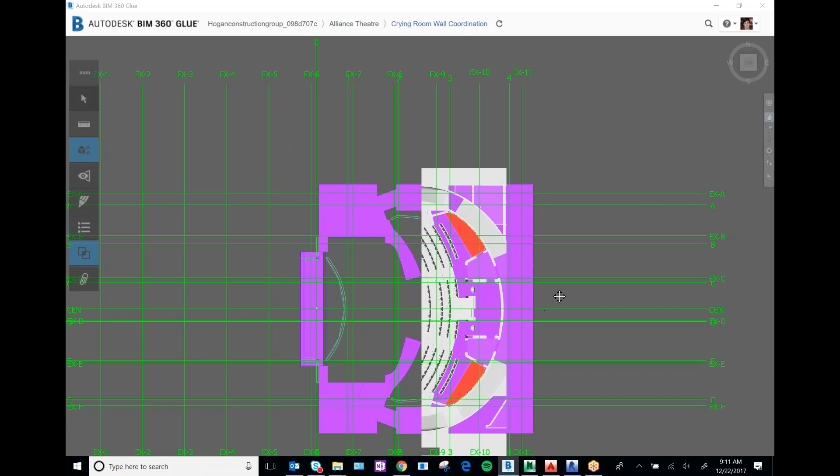Okay, yeah, I appreciate it. Thank you. Joe, were you able to get your stuff over to him?

No, I haven't got it in yet. When do you think you'll have it ready? I'll call and pester him again this morning since he was supposed to have gotten it as quick as he could, and I was hoping it'd be yesterday.

Okay, we keep needing to work on them every day. So I got the balcony, okay.

In addition to that, I got a points file from Hunter yesterday at 4 o'clock. And then I went and ran points on the crying room wall.

So that kind of leads me into the first thing we're going to talk about today. The best way I could look at this was in AutoCAD. So if we look right here, red is going to be the architectural model from Revit, it's the wall.

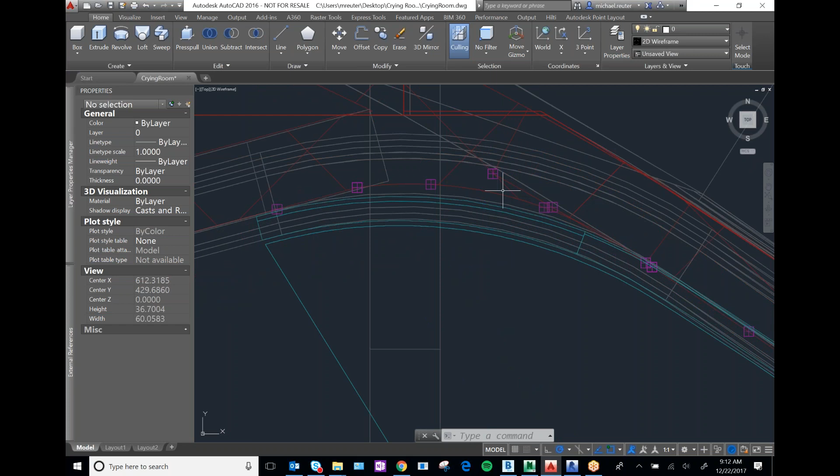Teal is Keller's model that I took, the DWG model from Glue, and then the pink little squares right here are the layout points. They're on, I think, 1 foot on center, but we had talked about 6, though 1 foot on center is good enough here. It illustrates the point perfectly.

So as I said in my email last night, as I was looking at this, I've looked at it in CAD, in Navisworks, in Glue, in Revit, and every time the same thing happens.

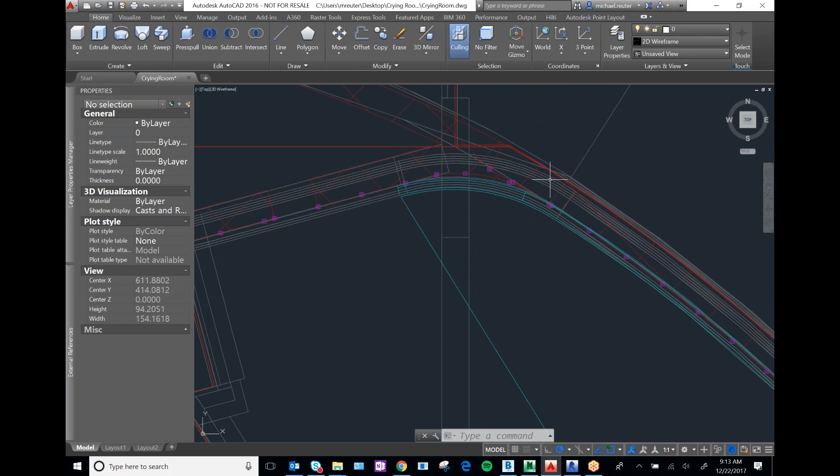You've got Keller lining up to a T right here at the north end of this wall before it curves, almost perfect. And then once we reach the center of this curve, we're off by about 3/4 of an inch right here, and then even over here we're off by probably like 1/4 of an inch.

So that leads me to believe that either it's an annotation error on the drawings giving a bad radius, or it was entered wrong. And talking to you guys, I really doubt it was entered wrong, because that would surprise me. So it's got to be one of those two things.

Because you can see right here the points line up, and as soon as we hit the center of this wall, we're off by almost an inch, 3/4 of an inch. So I sent you that file, and I wanted to see if you guys could confirm that it's not a modeling or some kind of viewing error.

I want to see what my... you can open either of the two, I would suggest opening the 3D APL file, but either one of those would work.

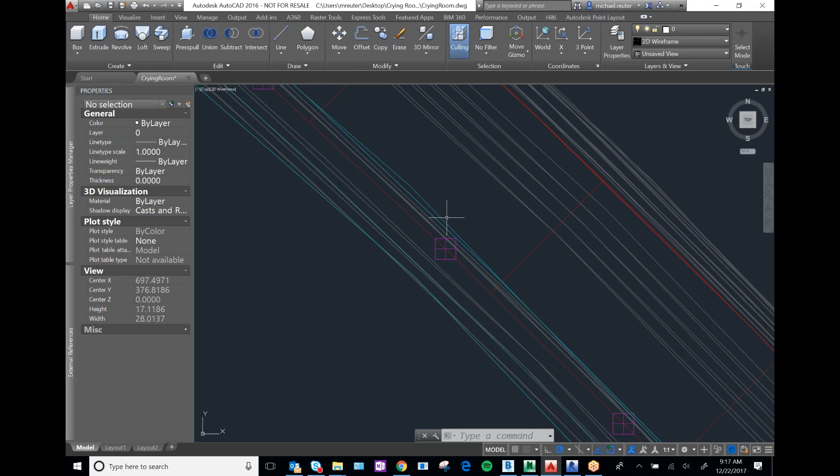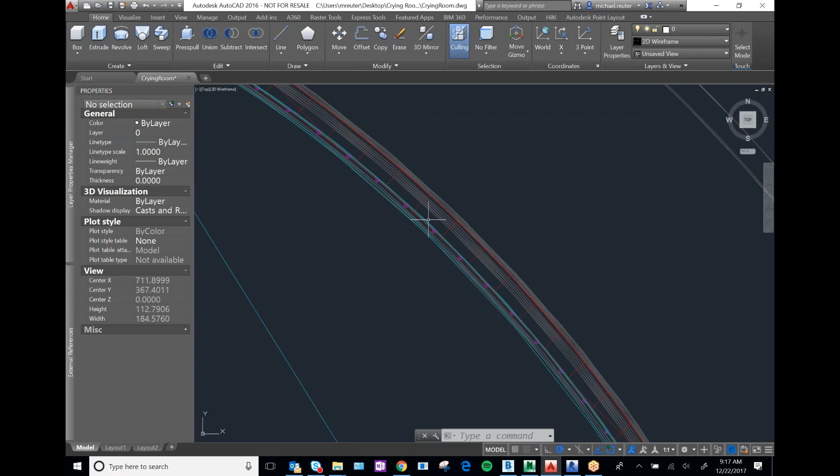We're closed all next week, but after the new year we will jump on this and follow through what you laid out for us. I hope it's just really a viewing error, but I don't think that's the case, because as we talked about last week, you increased your resolution 40-fold, and we're still getting seriously faceted curves, which we know we shouldn't be seeing at this point.

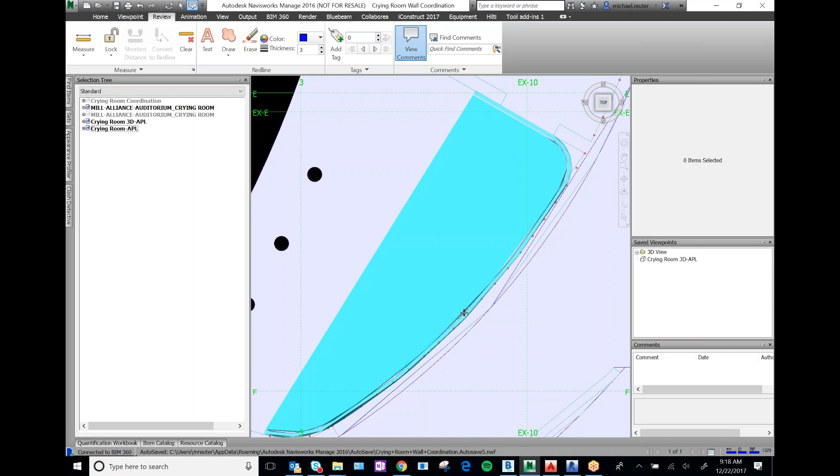So you can see when I'm in Navisworks, right here at the center of this wall, the teal points are right there. You can still see it, right when you approach the center of the wall. There's something, I really feel like there's a rounding error with the radius. That's the most reasonable explanation I can come up with.

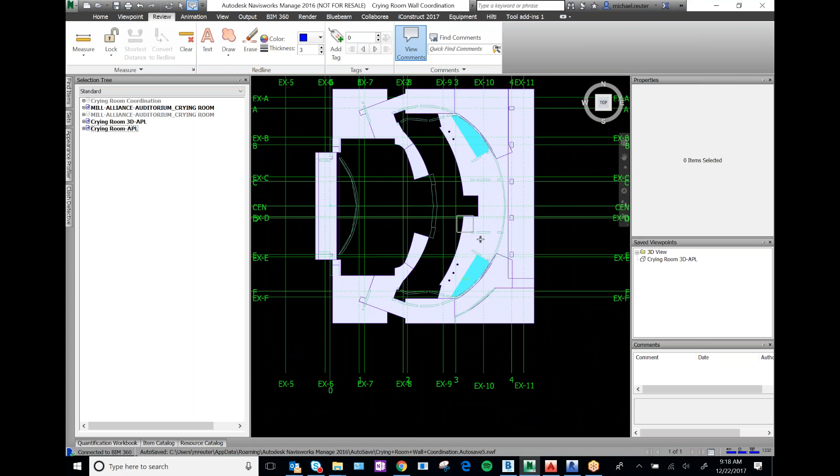So if you can indulge me, Michael, the first and second reflectors we got to you, those models are LOD 400, right? We've drawn and detailed everything that could possibly be in that assembly. How does the resolution look on those, the reflectors? Maybe there's something we're doing with those that we're not doing with just the simple surfaces, because right now the walls and other ceiling parts are really simple surfaces, since that's all the information we have right now.

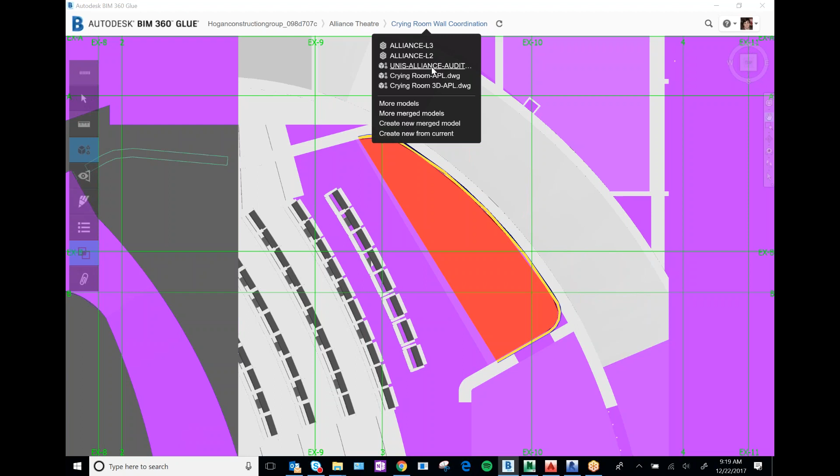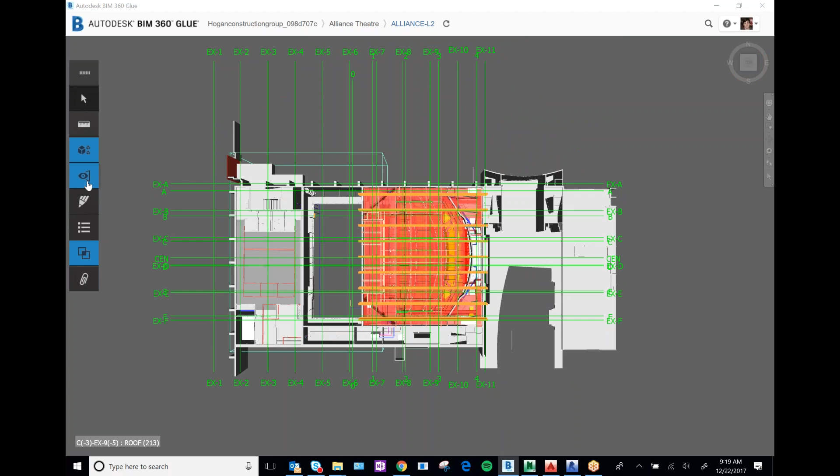So you're talking about the cloud ceiling, directly below the Unistrut models you got, I assume. Let me look at that, I've been looking at those a lot this week. Let me bring up my viewpoint here. Those are incredibly detailed. We'll jump right to this one right here.

So for some locations you've got the actual sprinkler head location in there. That looks awesome, so they fit in there. There were locations where they were off slightly. I noted them so they know to move it north. And I say, make sure, confirm that you're using flex pipe, but I know we discussed that last week.

Go ahead, and real quick too, this is partly for Hogan. Their sprinklers are coming down plumb, if you will, perfectly vertical.

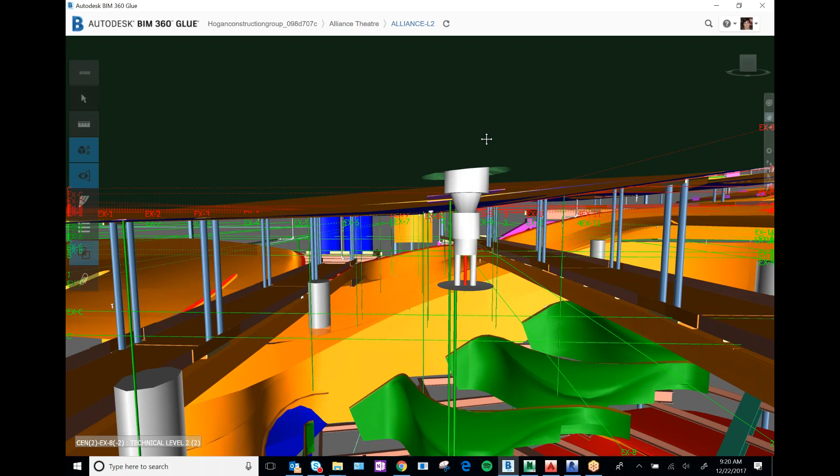Our holes that are cut in are normal to our surface, meaning they're not plumb with gravity like the sprinklers shown. It's not really a problem for us to do it one way or the other, but those are questions we need answered, because if the sprinklers are recessed or hidden and supposed to sit flush to the face, they can't come out plumb. They have to be set to our surface, which isn't flat or level, it's a curved surface.

Has Sentry joined the call? I assume not. Okay, he has not. I'll get that note over to them.

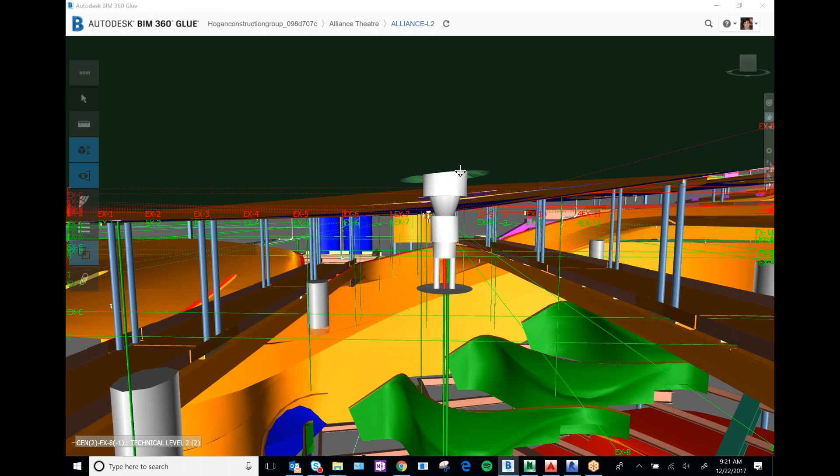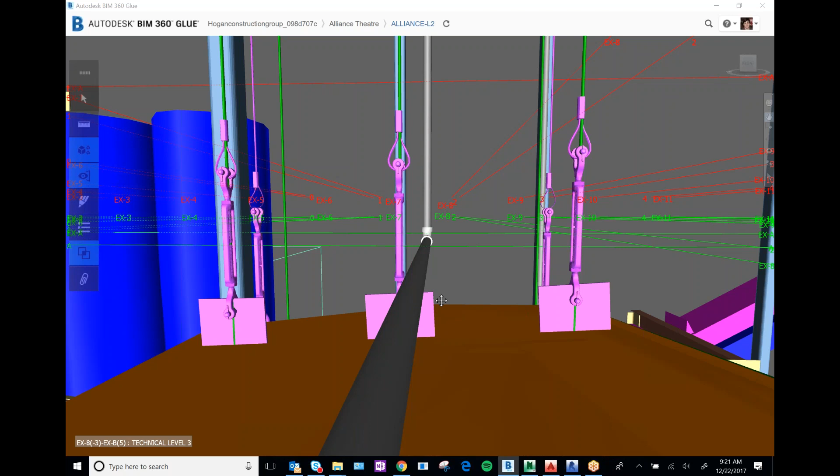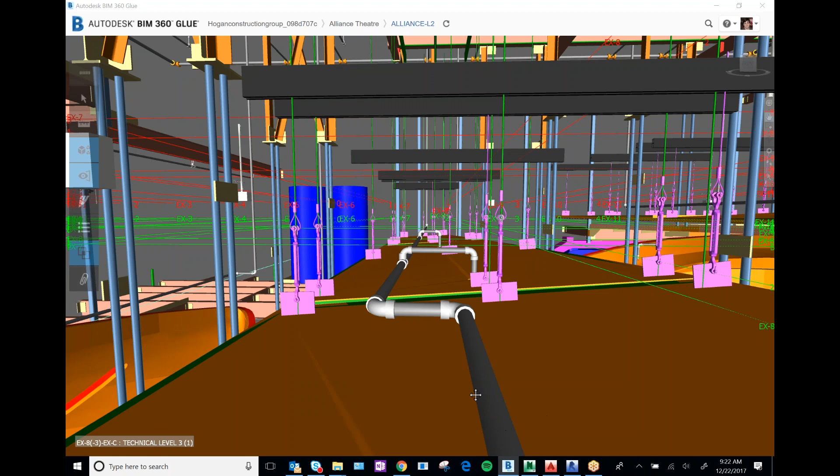I think that with using flex heads, that shouldn't matter, but we'll confirm. We have some pretty serious details in our submittal, Hunter, so if you just clip it out and send it to them, it's well detailed what I'm talking about. The way the flex head works, the hard pipe branch line stops within 2 feet plus or minus of the hole. I've never actually seen a flex head, but that leads me to believe there's enough play in there.

What's going to happen is right here - this is going to be the flex head from there down, so they'll be able to do whatever they want. On a flex head, it's basically like a wire mesh over corrugated pipe, so it's reinforced but pretty movable. A lot of those companies have started going to those so they can move them where they need to and don't have to be as precise in the beginning.

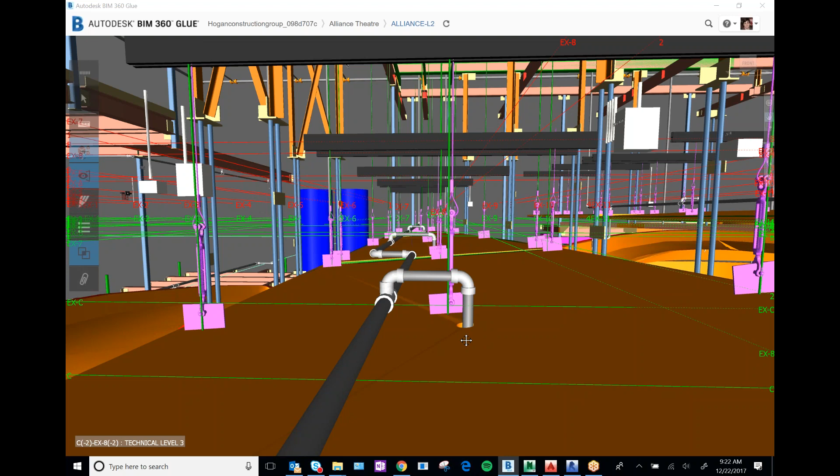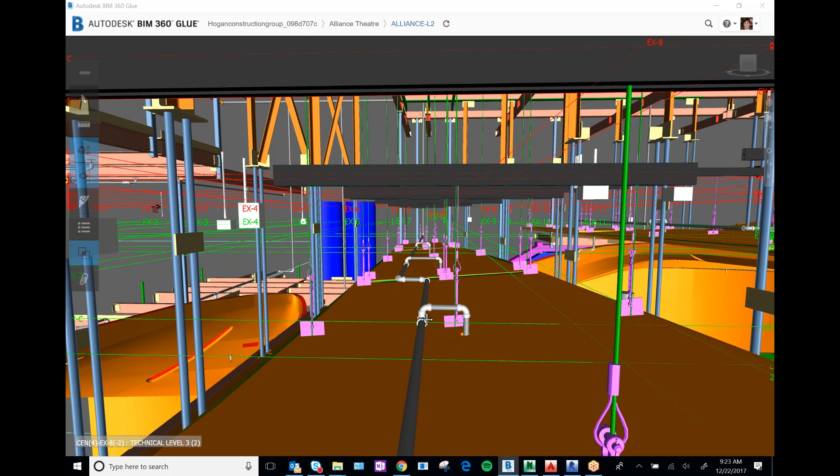So I feel pretty good about this. There were a couple of instances where on one of these cloud ceilings the sprinkler head was hitting your hangers, so I noted those for him to move. They were on either end of one of these cloud ceilings. I don't remember exactly where, but I noted it and sent it to him.

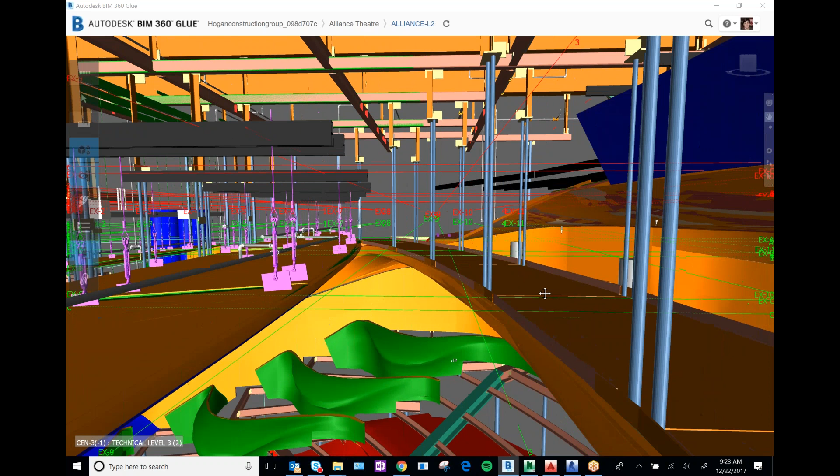This was fantastic - that's why I was asking about the locations of the holes, because we've got this one right here, you can see the holes are coordinated. But then the catwalk and both edges of your millwork, they didn't have them coordinated. So I was curious, since you guys had these set up before, did Century send you something so you had the locations?

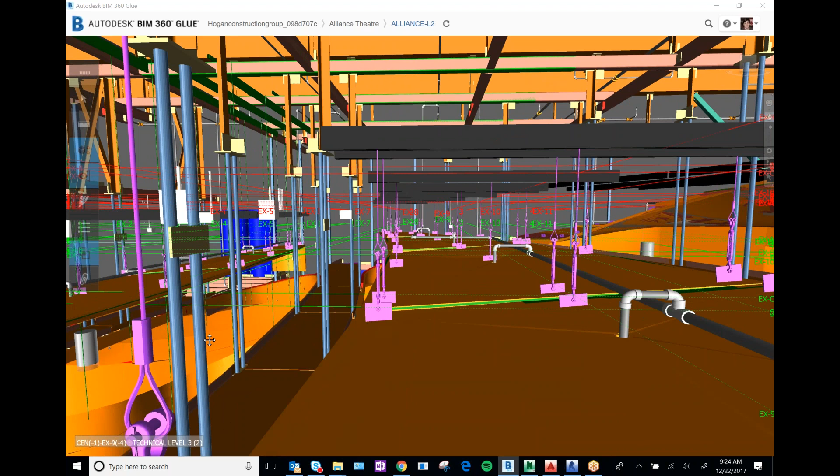I think we took it off of an ASI drawing. I don't recall exactly where we got it, but it was a formal drawing either fed to us by Hogan or by the architect - I think it was their original submittal, their original design that they submitted to the city.

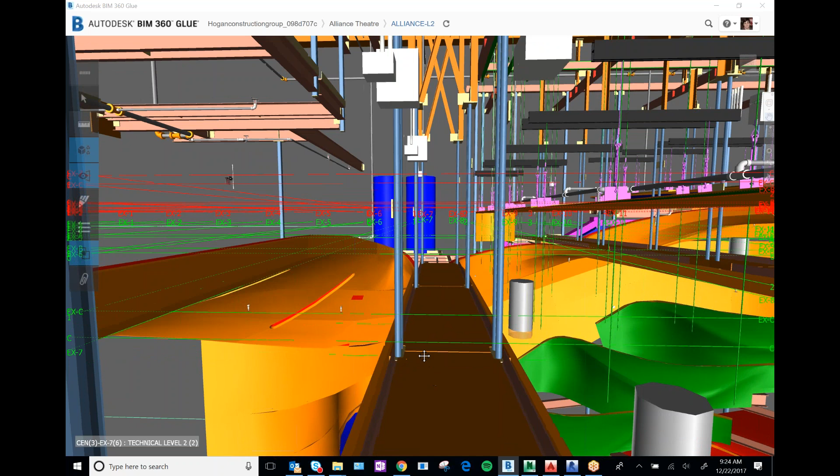So that was why - these were all perfectly lining up, and when I ran the cloud ceiling against it, there were hardly any clashes. But when I ran it against the rest of your millwork, it was like 5 to 10 times as many clashes. Part of it was because the sprinkler head below hasn't given you holes yet, I think it's just that simple.

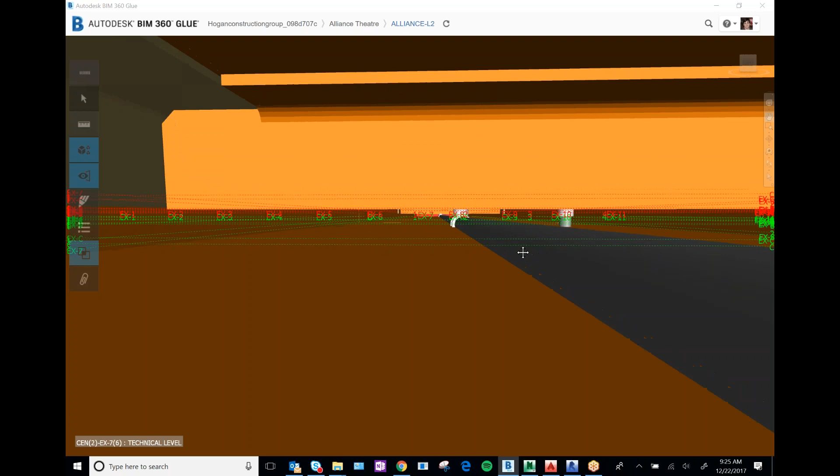We haven't - the first and second reflectors are the only ones we've been able to put into fabrication engineering so far, and that's not entirely finished. So we're working to get the rest done.

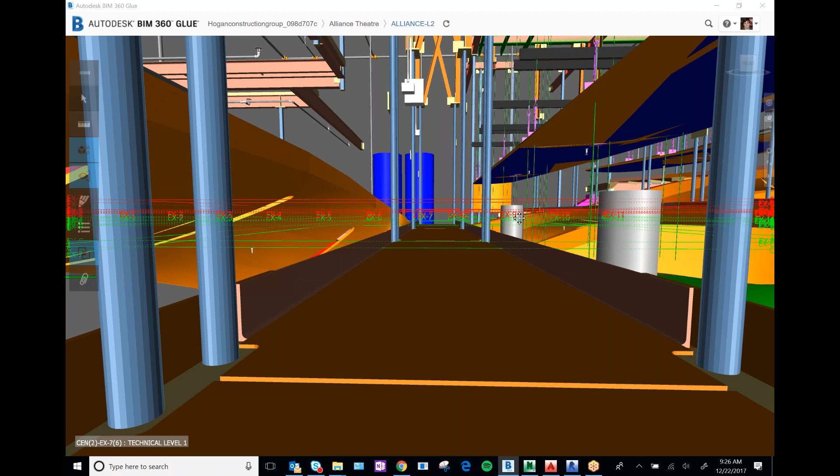I have a quick question. All those hangers we were looking at above those ceilings, how important are they, where they need to be? Have we looked at those versus the ductwork? Because there's some pretty large ductwork above those hangers, the Unistrut. I looked at those this morning and found there's an instance where it's in a different model, but yes, your large ductwork basically right here is getting whacked.

He's going through both the electrical - there's a whole lot of conduit underneath your duct. He's hitting that, and he's hitting this large duct that's coming up right here. I'll show you guys that shortly once we finish going over the sprinkler head, okay, we'll jump into that.

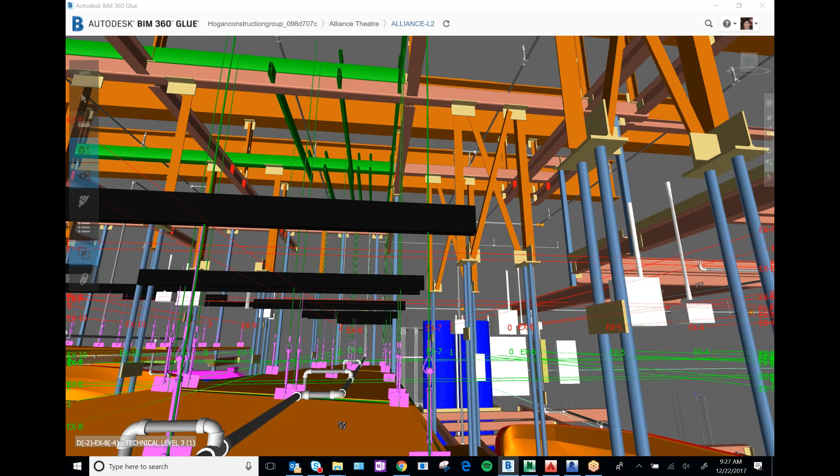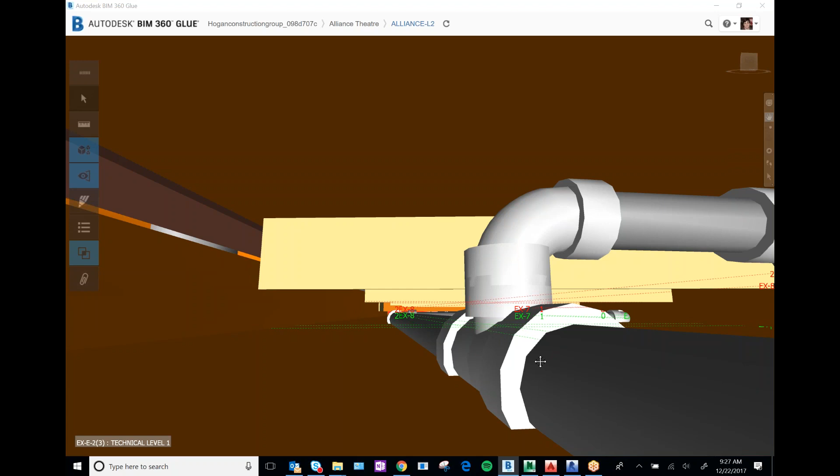Okay, so last thing about the sprinklers and the millwork. The thing I'm really most concerned about with the sprinkler heads is basically they're under here, in between your millwork panel and the bottom of the catwalk. There's support steel and sprinklers here. This kind of threw me for a loop - I was really surprised by this when I ran the clash.

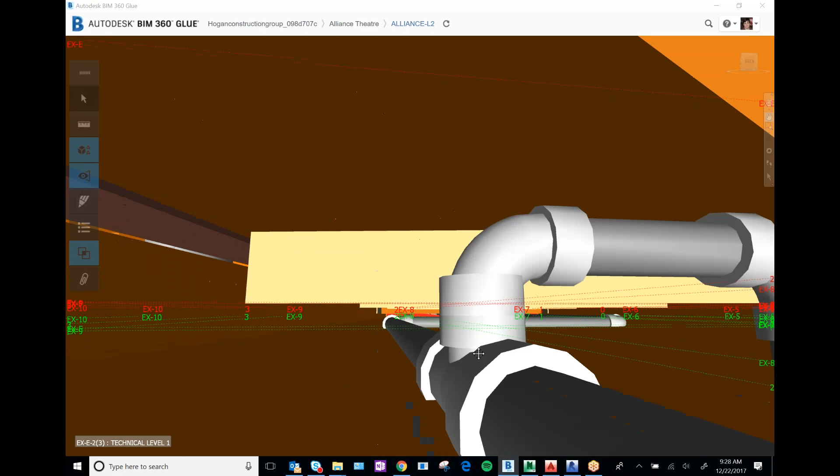The heads aren't really the issue, but I don't see how this pipe's going to run because you guys are curving in the X and the Y, but you're also curving in the Z here. So there's no way - I'm pretty concerned about this from an installation standpoint. The sprinkler head would have to be installed perfectly, and then our panels would have to slip around those exactly. And once our panels are in place, you're never able to get back in there and make any adjustments to the head of the sprinkler or to the pipe.

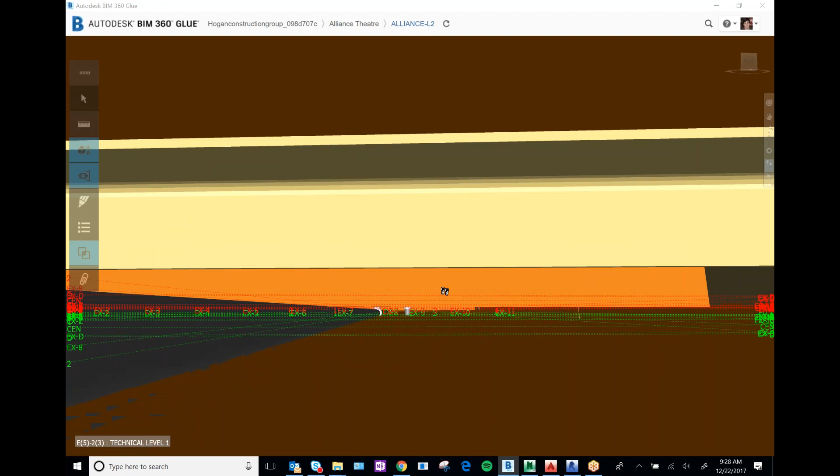Because the floor of the catwalk is not removable, right? It's welded down. It's already in. So I have absolutely no idea how - no answer. Like, when I saw this, it scared the hell out of me.

I was just like, man, this is the last thing that we need right now. This is something I wish I would have had in September or August or something. This is a holy crap kind of thing. So when I saw this, I'm just kind of blown away right now - this is freaking me out.

Is it the clash that's got you concerned, Michael? The clash with the millwork? Because we can pocket out the back of that millwork. I'm not too worried about the pipe that's running along the direction - I actually think pocketing it out isn't going to be a major issue.

Just from a job perspective, and Hogan's thinking too - wow, how do you get that in there and make sure it's coordinated so my millwork just slips right over it? Yeah, it's the constructability concern. It was both really, because the whole deal was, when we signed off last week, they're adhering to us - and this is one of those instances where that's just not possible.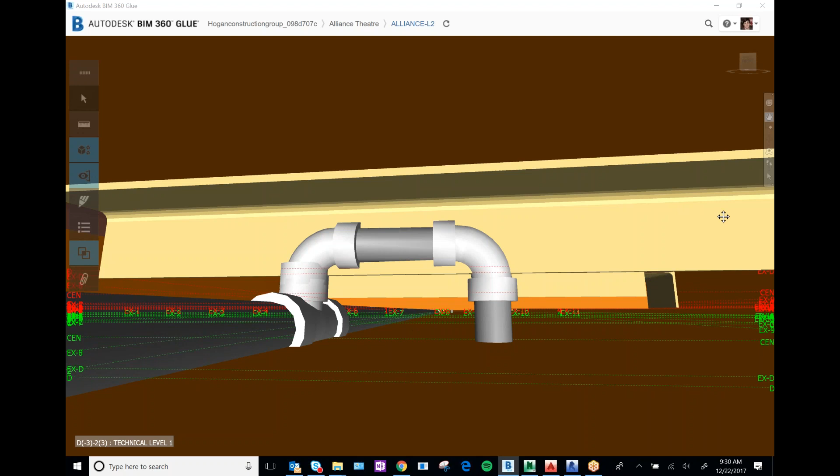The constructability of it really concerns me, because like I said, it's the Z coordinate that you're curving with right here. That's the problem. Every time that there's a grommet or a connection, it's deeper - I think it was like 3/8 of an inch into the bottom of your millwork.

Into the back of the millwork. Yeah, so I would say the only path forward - because even if that sprinkler was pushed tight up to the underside of the steel angles there in yellow, there'd probably still be a little bit of pocketing. I think the pocket is probably the only way forward to get around the sprinkler.

It's not ideal for us, just because when we're making that billet, it means that we have to machine it twice - we have to machine the face and machine the back.

So let's just keep - I would ask that you push Century, I think is the sub, to see if they can push it literally tight up to those angles and see if that helps even a little bit. Right now he's tied up against the bigger angles. I'm assuming that's why he's not hitting these smaller ones.

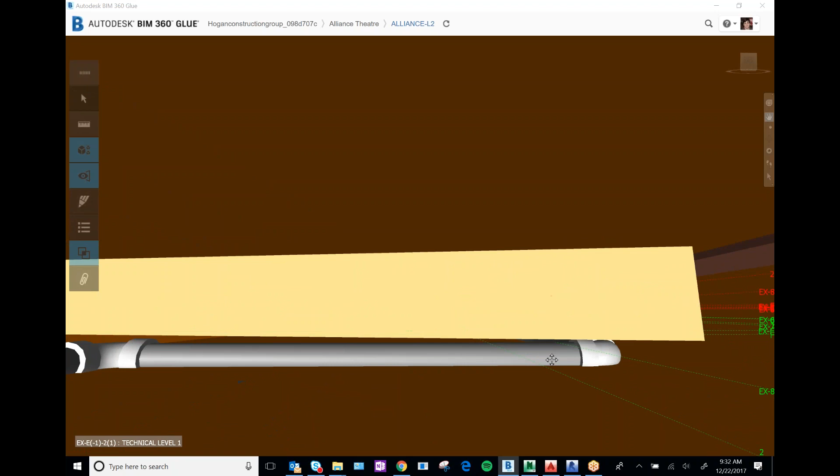But still, when you're curving, the way he's going to have to build it is going to have to be a much more heavily segmented branch, but then when he does that it cuts more into your panel. It's not chicken before the egg - it's the whole job.

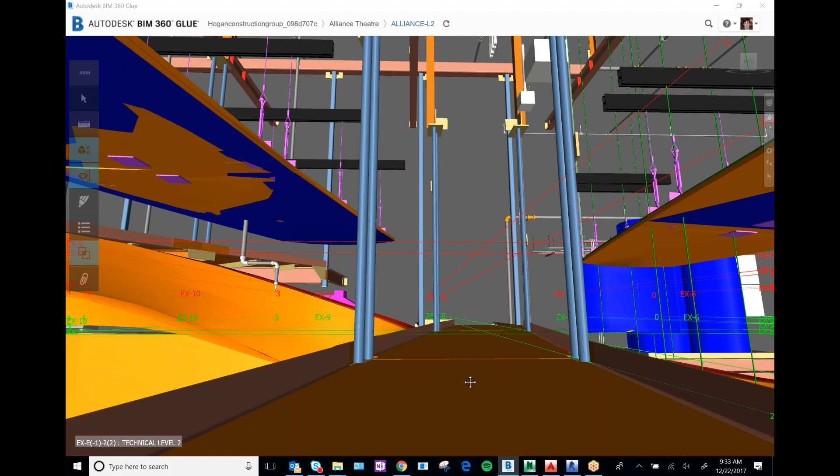This bummed me out big time when I saw it, because I was like, God, we needed this ages ago. But I sent the stuff to him, and the actual layout that he currently has - it's not, he's consistent with elevation, so he's into your panel consistently. The location of it - I sent the PDF showing it, and I marked up the ones that were the three going through this. So that's pretty much it.

Okay, so well - I mean, is there anything? Do I need to get you his DWG of this file, or this floor? Do you want me to send that to you, or point you to it, so that you guys can take a look at this next week or the week after?

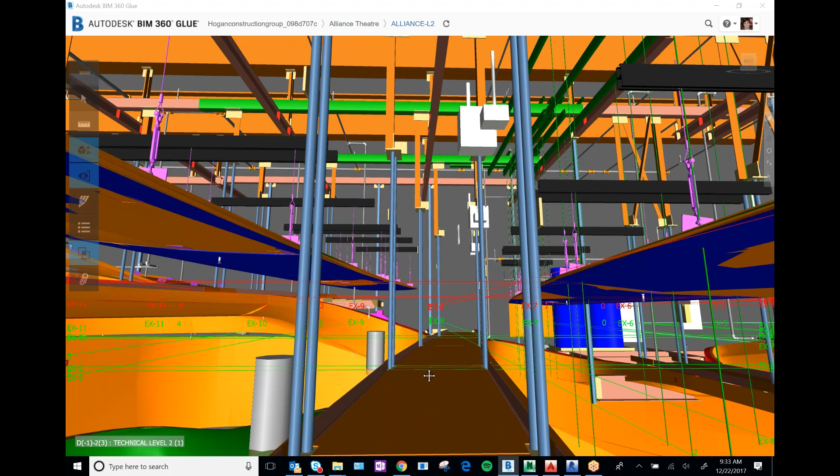Well, yeah, it would be - we're going to start picking into the millwork that's hanging below the catwalks, and the third reflector, that first week of January.

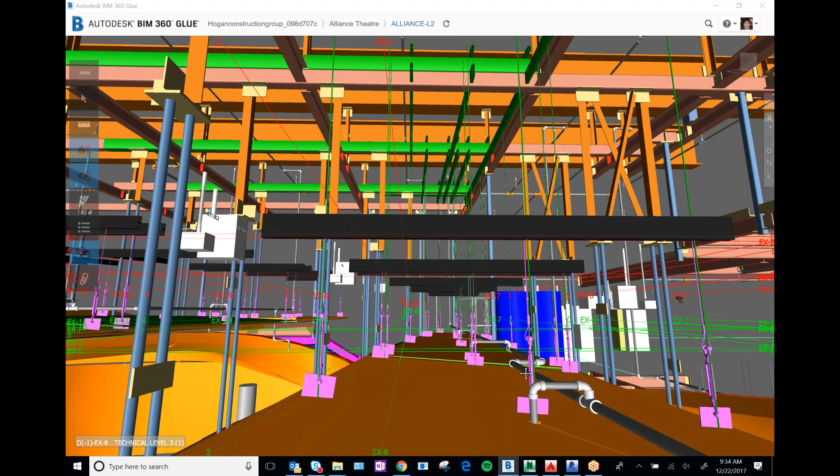Okay, so these guys, right? Yeah, so if they can give us a final layout - at this point it's make sure we're notching around some panels, we'll take a look at it. Hopefully it's not too crazy, and it's something that we can manage. If it gets to be too much, we'll speak up and we'll engage everyone.

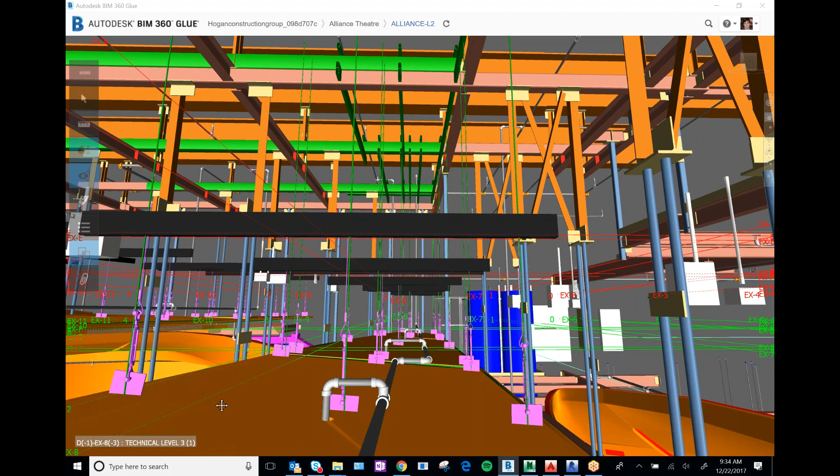With the cloud ceilings, there's only like 2 or 3 locations where you guys were clashing, and they were all because either he didn't go through the hole - he was way out here on one side of the panel - or there was like a riser hitting it, so I'm having him reroute those.

Right, so your cloud ceilings are good - you don't have to do anything with those. He's got to make it happen on the clouds. He or she has to make it happen. He's looking at not hitting the you -

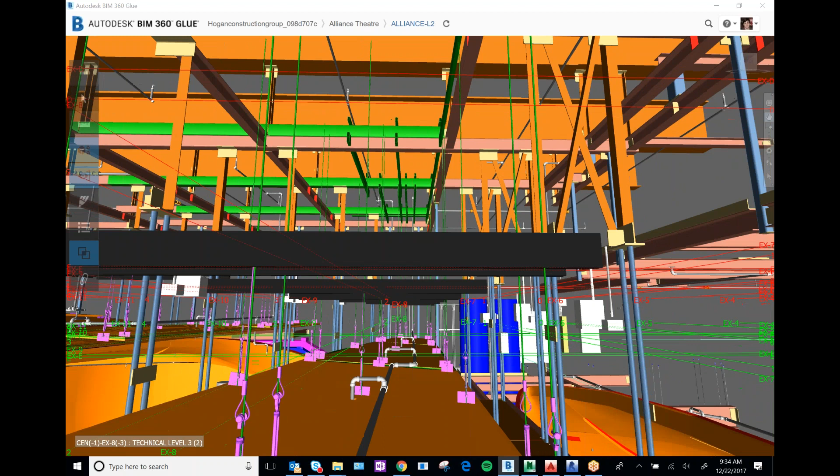I'm looking at the Unistrut here, and I can tell you right now, Andrew has to resolve a couple of these details because this isn't totally accurate. I think it's like a work in progress that we're looking at, because I'm seeing some clashes with the steel grid up here. I think we're just not communicating perfectly yet.

This is Andy from Unistrut, just getting on. Andrew, how you doing? That's just representing the thing from the first reflector, very early stuff - what I could get done. I see our stuff.

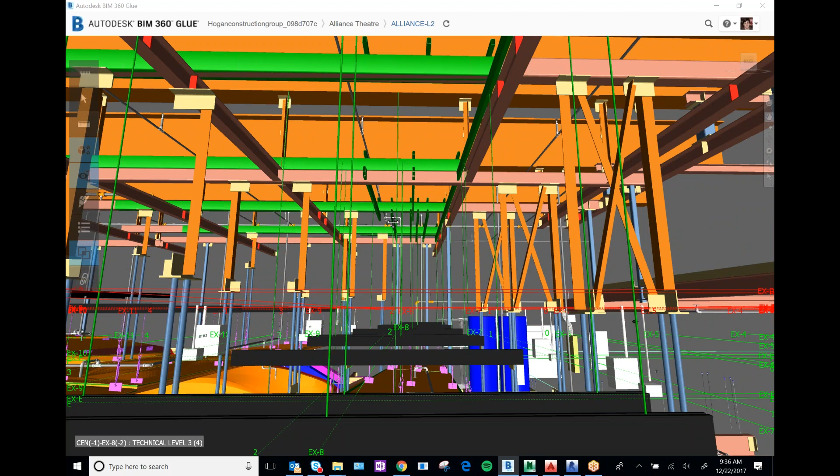Our stuff is the green right now, but it's really only the Unistrut that's way up at the top, and I dropped a bunch of rods to see how they were lining up, because I don't know if somebody else was putting in Unistrut below it - that shouldn't be there, right? It should just be the Unistrut at the top layer, and then we're going to send the cables up to that, straight down from that, which is what I was trying to show with those rods - but I haven't worked all of the uppers out yet as to where they are or not.

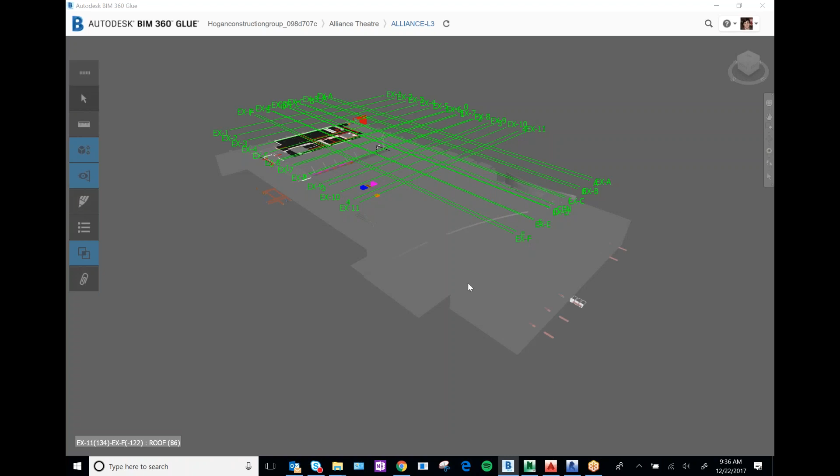Do we have a representative of whoever's making this cloud thing? That's me, Andrew. Andrew, why don't you and I plan to talk after this BIM call, and we can go through some of these details together. Yeah, that'd be a good idea.

All right, okay, so that leads me into the question that Clay had. Okay, so right here's our main issue. Let me just pull out all the clashes for MEP versus Unistrut right now. Okay, so right now, let me hide YouTube so we can actually see things.

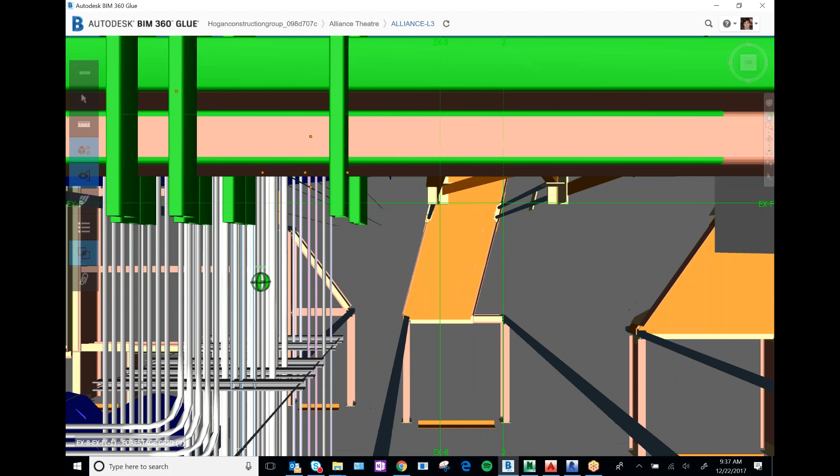Clay, to your point, the Unistrut right now is hitting your humongous, impossibly large ductwork right here. I noticed those. I notified Andy of these five minutes basically before the meeting today, so I don't expect him to really be able to talk on them, but yeah, I can say something.

Okay, what are we talking about? Is my Unistrut down into the duct? No, it's your hangers, and that's consistent. You're hitting both the electrical conduit that's here and the ductwork. What about that electrical conduit? Is it going to be able to do something around the duct? Yeah, that's a good question.

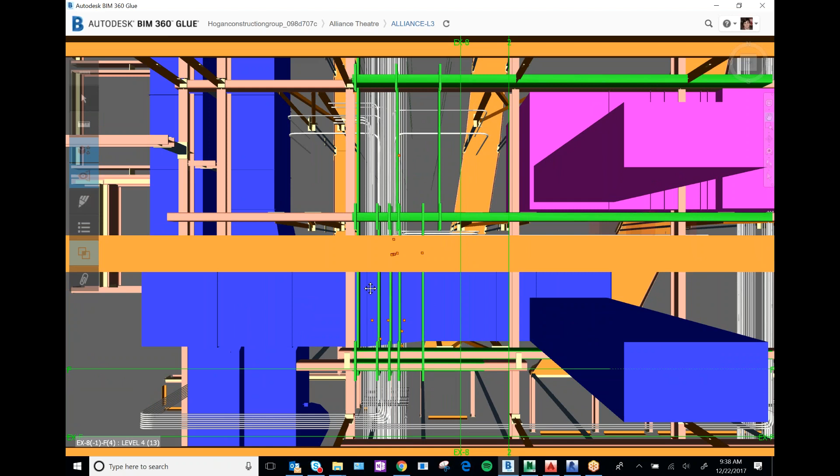Well, I think a lot of money was taken out for us to only do the uppers. So anything below that, are you contracting with us to come up with solutions to hang below? No. Yeah, Andrew, we're getting turned around here. I think there's a conversation you and I need to have. Maybe, probably with Dan Francis, since I think he was the senior PM on this. Correct. We need to keep that off this call.

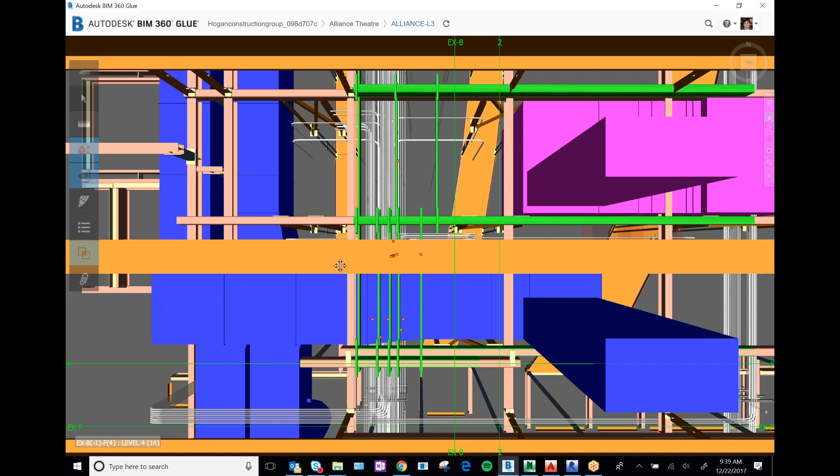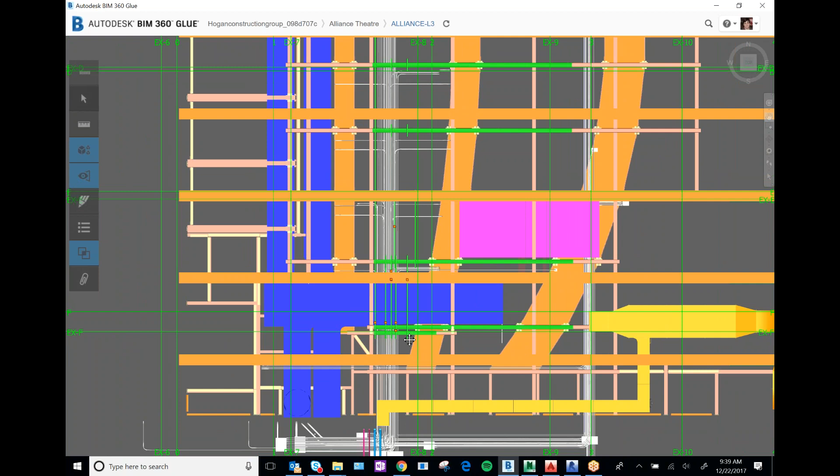But yeah, basically, Andy, just right here, this, I'll give you the column grid line, okay? Which column grid lines are not terribly helpful with this project, but basically it's just west of F2, okay? So it's basically that steel bay that's right around F2 is where we're having issues, okay? And it's pretty much with your hangers. So I would assume that you could tweak that, okay?

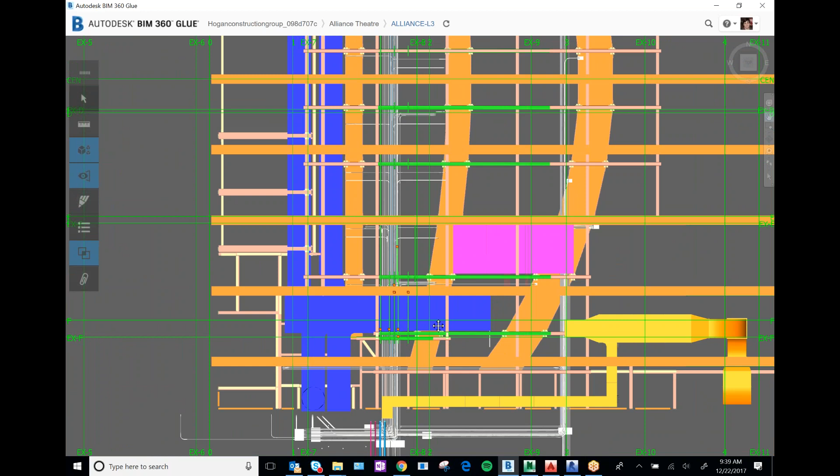Yeah, we'll have to maybe get a second call and get another one of these up there when our PM's in here. Because I think when you're saying hangers, you're referring to the rods. Rods, yes, sorry, the rods, yes. So they're not really our rods, they're not really our hangers. The issue sounds like, how do you end up trapezing around under this, and that's increasing our scope again. Andrew, again, that's a separate call.

Exactly. Michael, to answer this for you, we're aware of this clash as of recently. It's essentially what we're going to do is Unistrut's going to have their layer up tight against the grid. It's going to be pushed so it does not conflict with that massive duct there. And we're going to drop down, and then CW Keller, not Unistrut, will probably find a way to adjust our attachment points to make that work. Okay, cool.

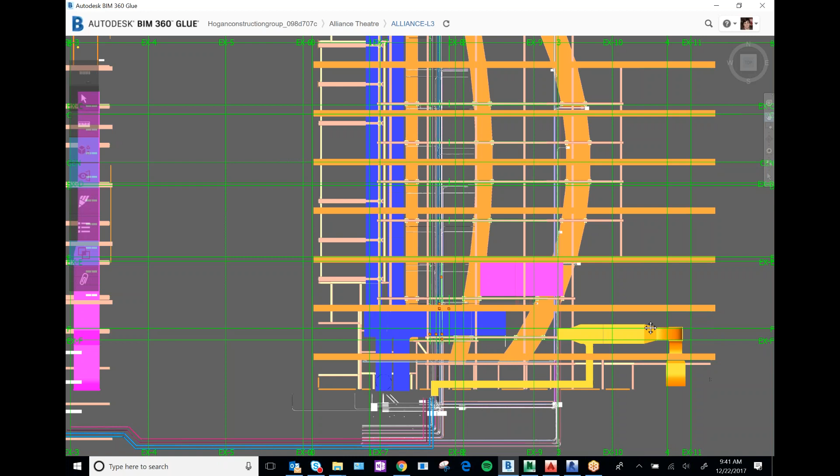So yeah, that basically was the only real issue that I saw with the Unistrut thus far, just right there. If you guys are going to have something, I'm going to assume you're going to have some more stuff right here. You're going to also have an issue at EX9 and E, or 3E. Okay, and yep, you may have something at EX, or let's just say 4 and F. Okay, you'll have an issue right there as well.

And then, if God forbid, hopefully you're not going to be going down, are you guys going to have stuff along column line 1? It's whatever's directly over top supporting the reflectors. Column line 1 is above the forestage reflector, Michael. Yeah, so yes, there's certainly going to be attachment points there. We don't know what those are yet.

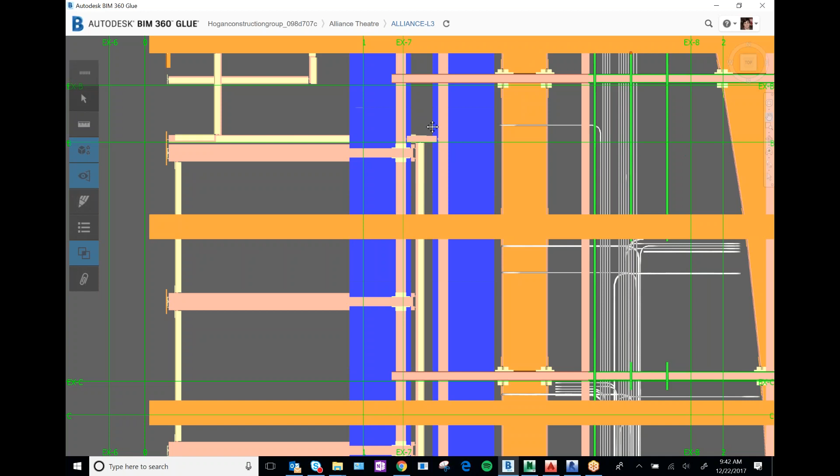Okay, with the steel at least, like Clay has modeled it so that you can see right here. Basically these little, we'll just call them columns right now, but they're like small pieces of tube steel that go down right here, and it's missing the ductwork. So if you can connect to the steel that is just west or just east of EX7, basically along, you can see the hole. But if you guys can connect to that, then you're not going to have a problem with this north to south ductwork.

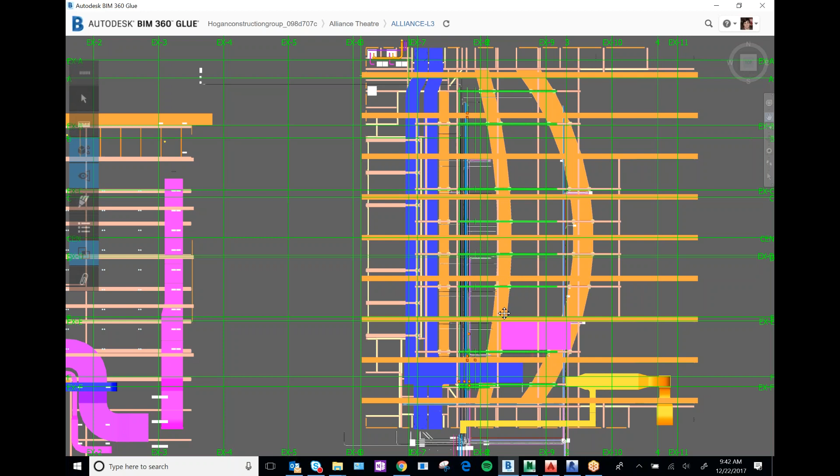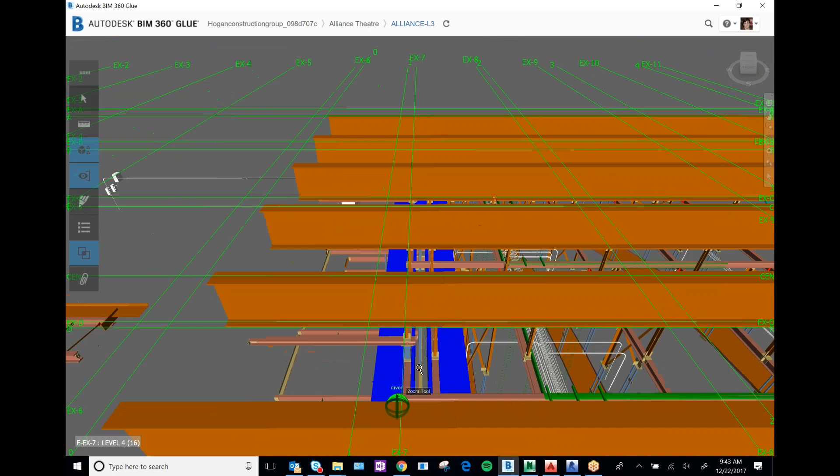Are you referring to like there should be Unistrut over there as well, or something? Andrew, that's an additional scope that we're working with you guys on. Right now, we've only been able to release reflectors 1 and 2, because that's what we have approved shops for.

Okay, cool, I'm just coming up to speed. I guess that's pretty much it. What else was there, something else we need to discuss? Kent and Joe had something, but I can't remember what it was.

Well, I do have something myself. What I was noticing when I was first doing this, assuming there was nothing in the way, I was using those rods that I drew in there as guides, as gauges down to where the reflectors are. How set in stone are those locations in terms of where it connects to the reflectors?

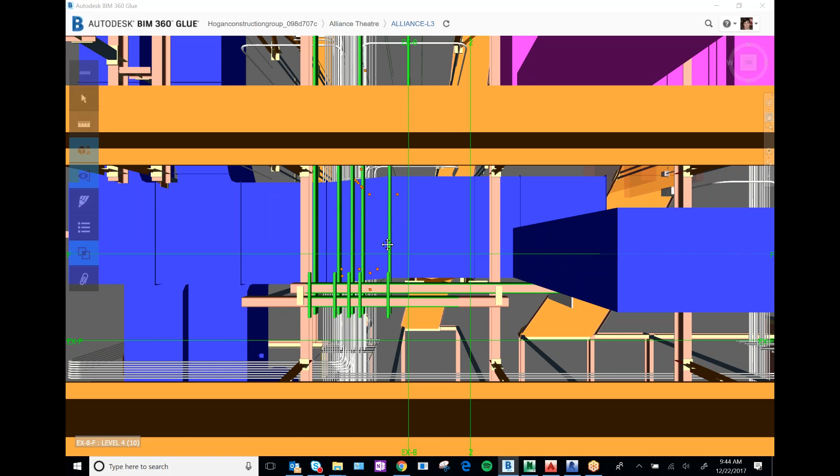So Andy asked, that's a question to us. They're very well set, but if there are unavoidable conflicts, we can engage moving something if that makes attachment easier. For example, there's some stuff I was trying to reconcile to make it a little bit cleaner, because basically Unistrut right now, as far as I understand, is just supposed to be spanning across and clamped to existing tube steel that's 8x6, the grid.

Some of these rods are so close to each other that it makes sense to me that you line them up so that they're just falling off, coming directly below the same piece of Unistrut. Others are too close together that I can't do anything about. I can't put a Unistrut in the same support bay less than the thickness, less than half the width of the Unistrut away from the other. You know what I'm talking about?

I don't... trying to... I don't. Well, our Unistrut is 1 5/8 inches wide. And some of these things in that direction, which we'll say is the north-south direction right now, are to hit another one of the rods, not 1 5/8 inches to the right or to the left. It's something less than that, and there's no way that two Unistrut can occupy that same area in space, only like a fraction of an inch away from each other.

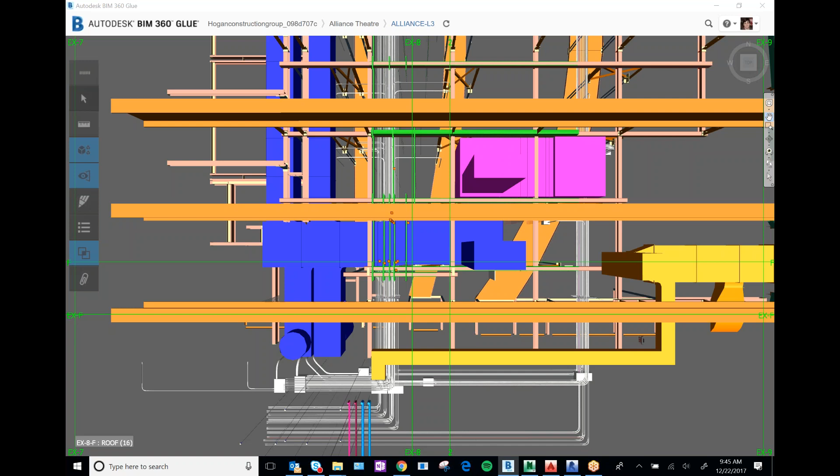Yeah, that doesn't sound right to what we intended. So Andrew, I think again it's a separate call. I think before this meeting we should have had our kickoff BIM coordination call, this isn't the right call to review that. But yes, that was not the intent. It sounds like there's something in our translation that's not working.

Okay. Any other questions for me in regards to this Unistrut then? Not in terms for right now.

I don't have questions for the overall coordination, but if you have time this morning, I'd like to get on a call with you and Dan. Yeah, I've got another one, this is like BIM meeting call number 2. No, and then I've got another one coming up in a few minutes. But if you want to try and figure another one, then I got another one at noontime, Eastern Standard Time, another drafting meeting, and we're here only until 2pm this afternoon.

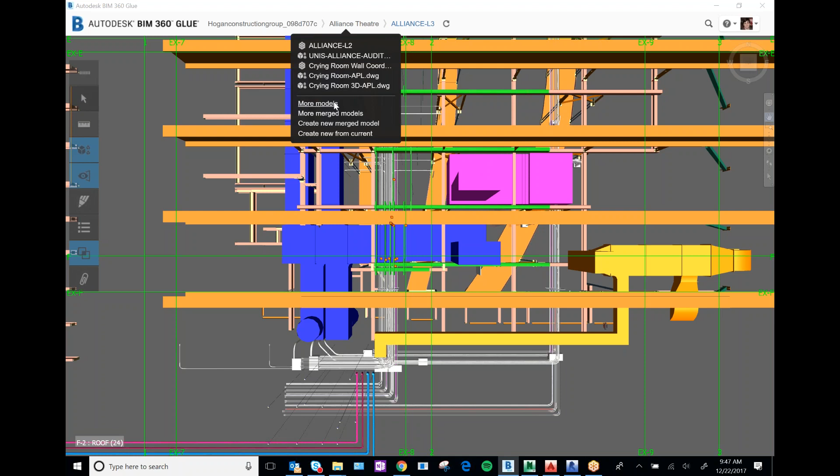Okay, so on the catwalk at the front, or the east end, if you look at the structural drawings, that would be your detail or elevation plan 2 on S114.

Okay, so let me go to Procore. What was that number again? S114. Okay, I'll try to bring it up on my end as well. Alright, I might just be able to describe it to you. I'm almost there, drawings. Man, I really like how they do their drawing sets. Okay, so all discipline is structural.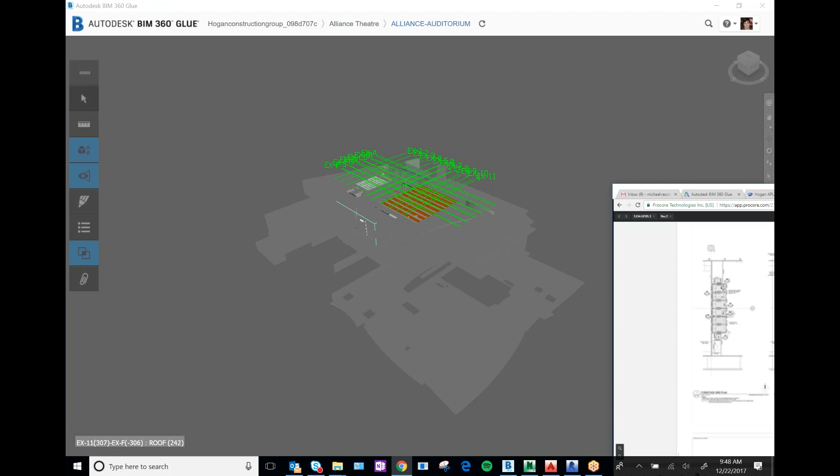Or maybe we should have just looked at it on your model, on the BIM model. Well, it's coming, I got just you. Okay, oh there you go. Alright, so when you look over to the bottom right, down there below, down where it says catwalk framing, and see the reference elevation, keep going, it's over to the right. Okay, yeah, you're almost to it.

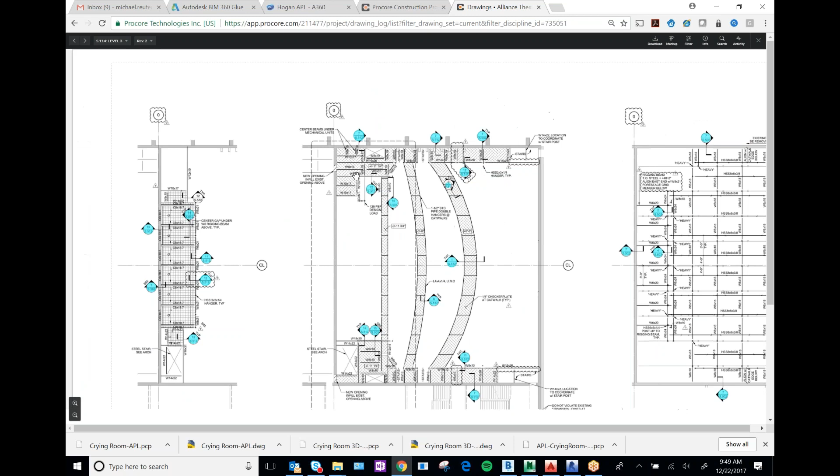34.6. Okay, now go back up here to the plan, and you'll see that we're minus 4, 11 and a quarter. Yeah, so that puts us to 29, 6 3/4. And then with the revised set of drawings we got, is ASI number 7, plan A402.

If you want to go to that, yeah, I'll hop on that one. I'll show you how important it is to cloud things.

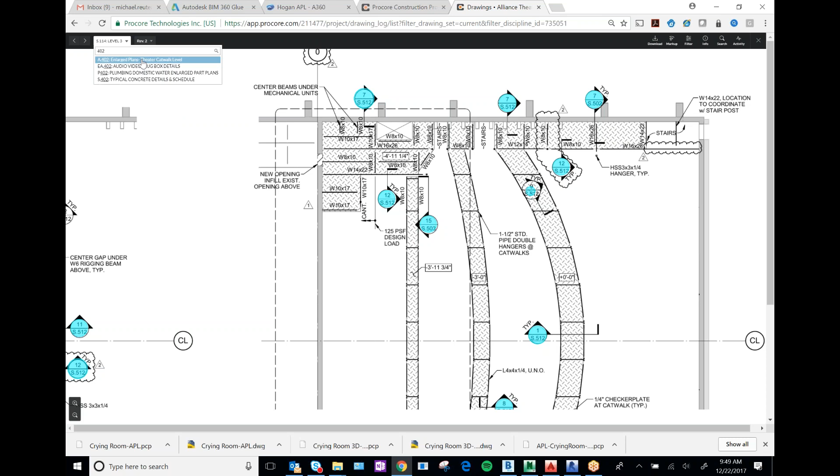S402 or A402? A402. Got it. Okay, zoom in down the bottom left.

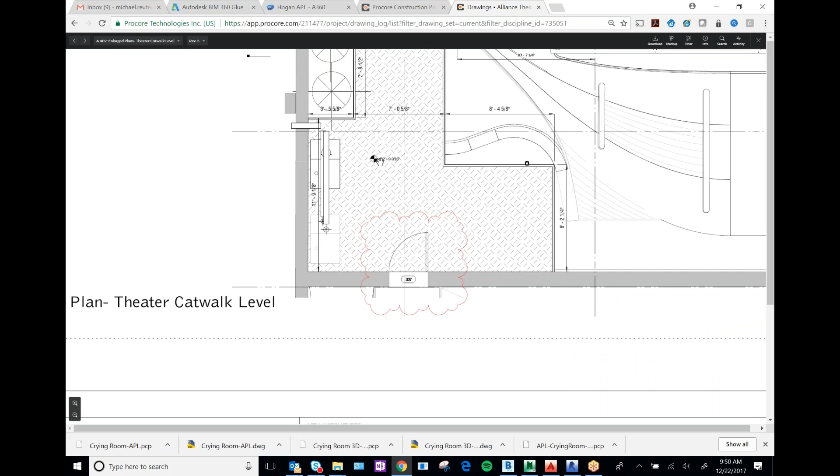All right, see where he put a cloud around door 307, but he actually changed the elevation of the platform. See the 22, 9 3/16? If you take that and add 7 feet to it, because he's moved the elevation from 0,0 at the stage to the back of the auditorium, or back of the theater. So you have to add 7 feet to that. So it's 29 foot 9 3/16.

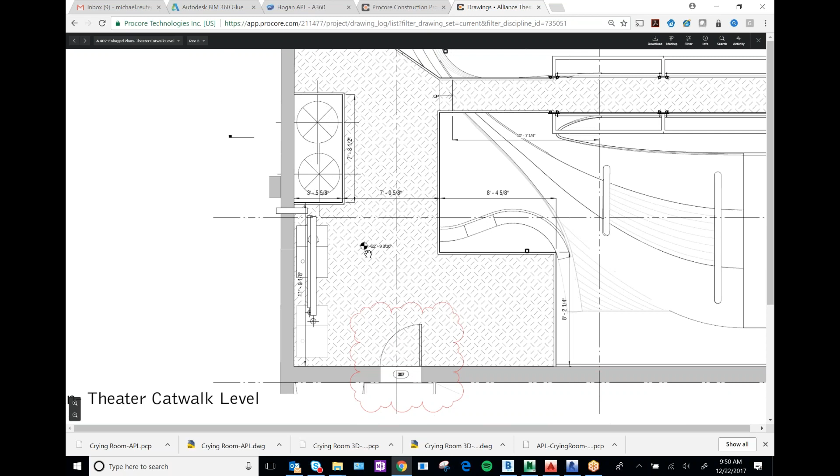Actually, he raised it up, not lowered it down. But it's kind of hard to catch things like that unless you back check his drawings. Are there clouds noting that? There's no clouds in the drawings, Joe. That's awful. Okay, yeah, I see it. There's no cloud right there. They clouded the door, but what they did, they went back.

They went back and figured out what the elevation was on the 2 catwalks that are right there above the stage. And when they did that, that's when they put the elevation in to match the existing. To match what you built. Well, maybe it's the fact that I can't find a drawing before that actually had an elevation right there.

You remember, Kent? No, I mean I get my elevations mainly off the structural. I know, because a lot of it, I mean, way back when we were dealing with the mezzanine and everything, we were pointing out consistently the structural and the architectural and the as-built conditions did not match each other. Yeah, but apparently that's what they did. They just went back and figured that out and then put it on the drawings as part of this ASI 7, but didn't cloud it.

Yeah, but at any rate, I just got to coordinate with our stair people. But as far as what it does with Keller, we're up higher, so it shouldn't be a problem. It should be better for them. Oh, we're up higher, so it's easy. I mean, that means you can adjust connections on the hangers. Yeah, that's right, rather than stretching the hangers. Yeah, that don't work too well.

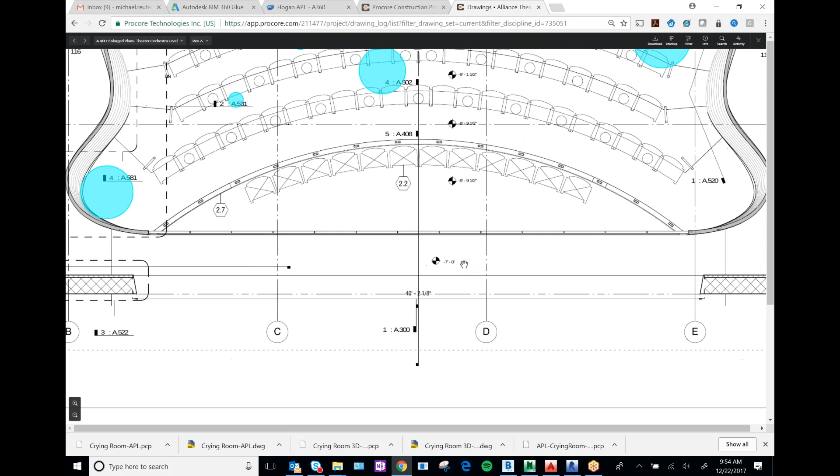No, yeah, -7 right there. That's what used to be, and then if you go to the 0 back, Joe. If that, if you want to, we can do that.

But if it's just a datum change, I don't need to. All that I'm doing is, once I get your file, I'm subtracting whatever your offset is by 7, or adding 7 to it. I guess that's really all that I'm doing. If the steel doesn't change, we've got it in the model, right? Yeah, in the location. But if the steel, if one piece is moving down 6 inches, I would like to see that. But if certain pieces are, if the whole thing is just shifting down 7 feet, the relative dimensions are still accurate.

That doesn't concern me. You changed the origin - yeah, all you guys are going to want to do that for your shop drawings so your guys don't accidentally put it 7 feet too low or high.

I don't need to see that. Actually, we don't want to change our shop drawings because that means changing each and every thing. I don't know why they decided here halfway through that we're all of a sudden going to change the datum point, but there's a lot I don't understand.

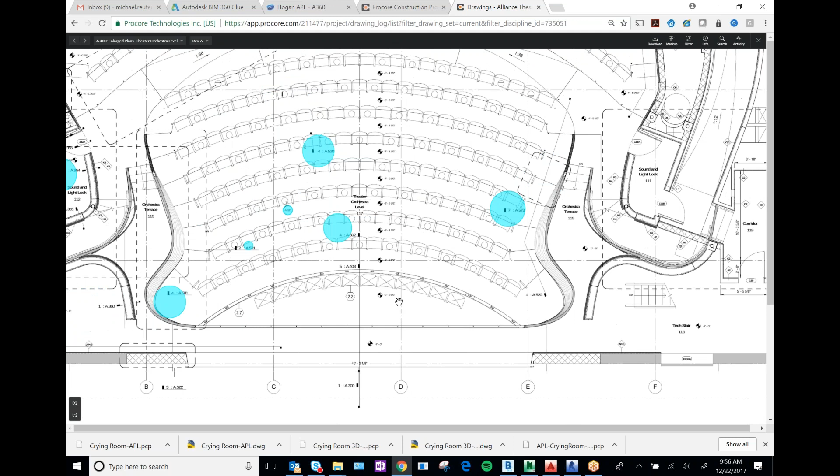Like I mentioned to you, Joe, we could do that, but I think it presents more of a risk of getting something wrong because the erector's using our drawings, and my old axiom is let no revision go unpunished. If you start revising something back, and you miss something, then there we are.

Go back to the original part where you said Chip's wanting you to move it. He's wanting us to coordinate to that elevation of 22.

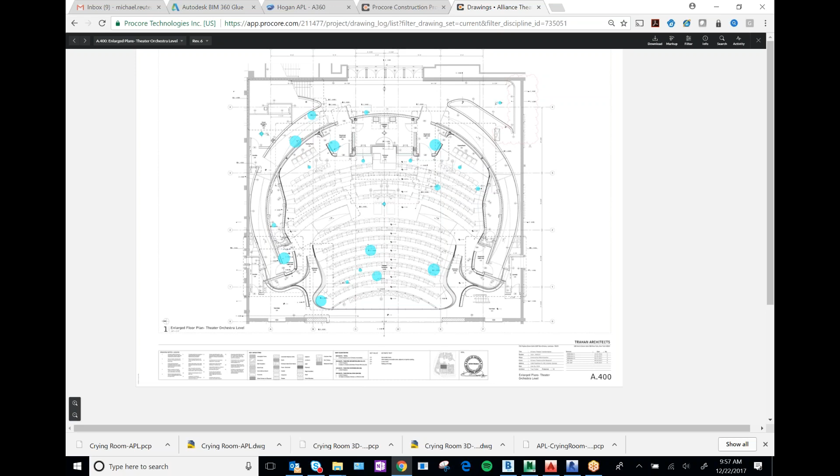22, 9 and 3/16, which is really on that A402. ASI number 7 is 22, 9 and 3/16. That's the 7-foot difference - he's at 29, 9 and 3/16, and we're at 29, 6 and 3/4.

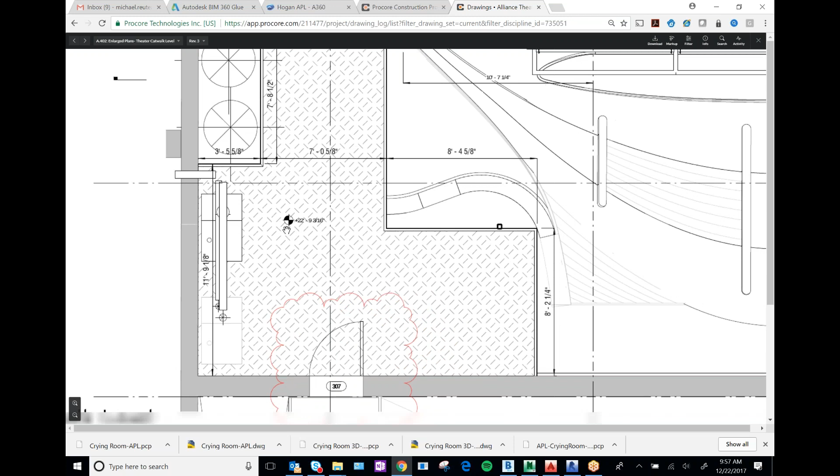So we need to go up. I was talking to Chip and I got confused - I thought he told me they were lowering it.

So it's just what we're looking at on the screen - that's the north platform. Well, it gets a little worse. Michael, go down to the one at the south, and you'll see that...

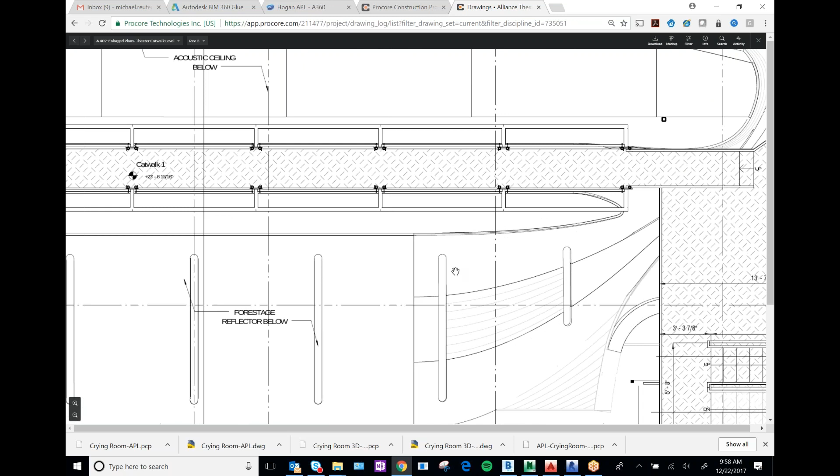The existing catwalk that's to the west of that door is actually a little bit lower. So it's 22, 9 and 3/16.

I guess he didn't know that then, because they were telling me there was a difference when they shot it in the field, so he didn't account for it. Oh well, never mind about that part - I guess they didn't tell Brad.

Back to what Michael was saying - so this is 2 platform areas that we will have to adjust in our BIM model.

I'm trying to figure out the best way to do it, because obviously all of this is 100% fabricated in the field, right? We got to revise our field drawing, our field use on that S3 or E303.

Is your erector going to make the connections and everything work out? Is he going to just change things to field welded and adjust it up? Yeah, he hasn't done any of that yet because we just found out about it yesterday.

I'm just trying to figure out what my impact is. We'll talk about it off the meeting. There's no easy way of doing this in the BIM model - that's my dilemma.

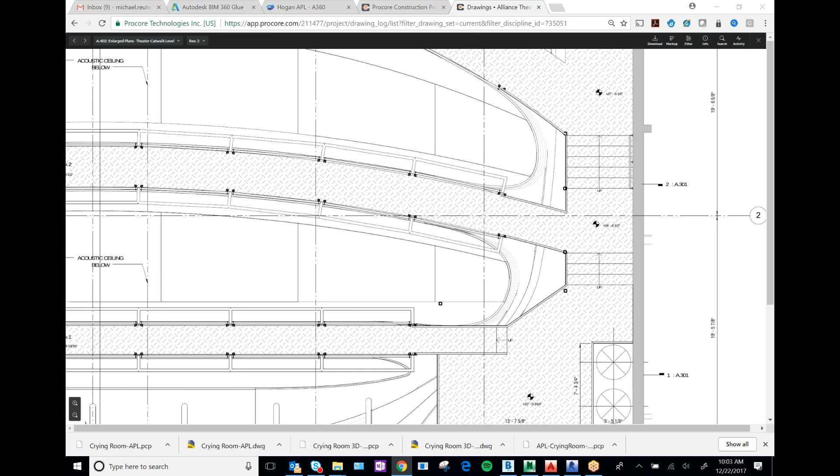That's right, at the ends. Do you have something telling the degrees of that? It's such a complicated equation - I don't even think it's essentially a parabolic curve. If you understand it, the radius is constantly changing across.

So I don't even think that parabolic curve has anything to do with my millwork. That's one of those locations where I can't give it to you - I think you have to pull it from the Revit. Unfortunately, it doesn't really have a lot of relationship to our millwork.

We fast tracked component 4, and remember where that outrigger at the very end punches through the millwork? It doesn't punch through around a millwork box, it just punches right through. I believe we've modeled in where that opening is, and that's something we'll just have to coordinate back and forth on.

So we can do that. Pretty much what I really need to do is just go out there and look at the model and see if I can figure out how much to make it look like it slopes to match the top of your rail. Yeah, it's just such a complicated thing, I just don't think I can give it to you. You know what I mean? And anything that would make sense, it would just be...

Here's the same 3D model you have. I was going to get with you all week to talk about it because when Robbie said it, he made it sound so simple. I was thinking, oh God, it can't be that simple. Yeah, no, nothing simple. All right, I'll figure it out.